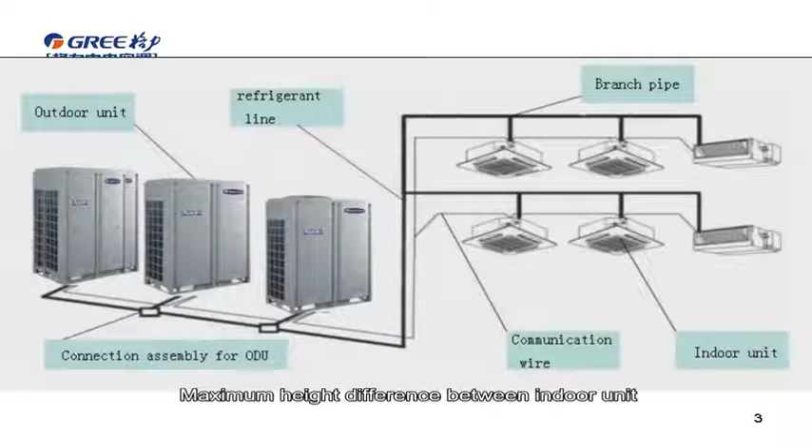Maximum height difference between indoor unit and outdoor unit, which is 90 meters. Maximum height difference between indoor units, which is 30 meters. This design is adaptable to various complicated projects and greatly reduces installation difficulties.

Secondly, high static pressure design. When the unit is installed in the equipment room, relevant static pressure can be set according to the project status. The static pressure of GMV5 outdoor unit is up to 82 Pa. Thirdly, auto-addressing and non-polarized communication. Connection is flexible and installation is convenient.

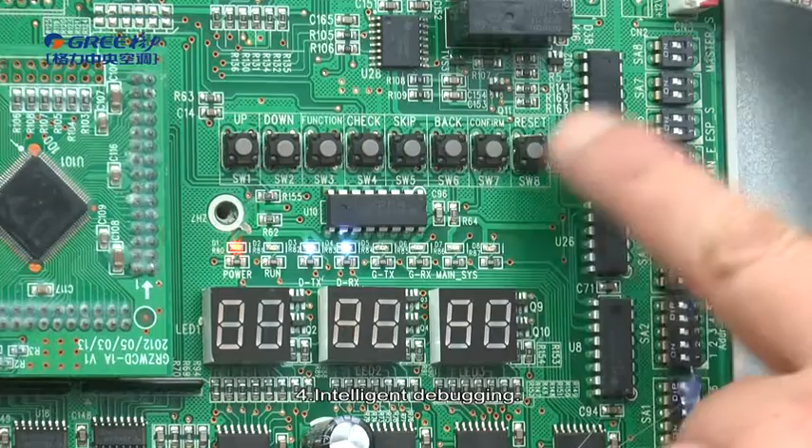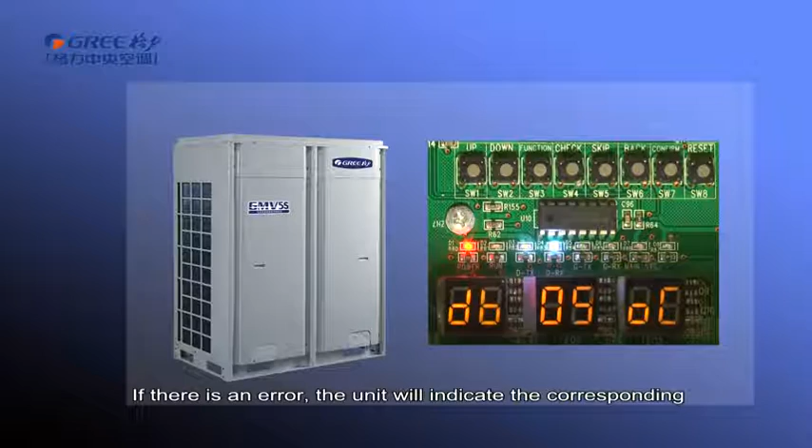The fourth, intelligent debugging. Debugging can be arranged through the button of outdoor unit and debugging software. During debugging, the system will check the quantity of indoor unit and outdoor unit and detect errors automatically. If there is an error, the unit will indicate the corresponding error so that the problems could be quickly solved.

The second part, installation project design. Firstly, model selection project design. A. Confirmation of operation environment. GMV5 can apply to office buildings, supermarkets, schools, hospitals, etc. Please select relevant type of unit according to the location. For some special sites with much dust and strong electromagnetic interference, sufficient evaluation and related measures shall be taken, such as adding filters and isolating power supply.

B. Confirmation of operation requirements. Please take sufficient communication with end users at the beginning of designing. Clearly understand users' operation demands, for example, indoor ambient temperature requirement, concrete object of using the unit, central control. C. Confirmation of project installation requirements. Communicate with the project consultant to see if the reserved installation space is sufficient and if the endurance of building is sufficient.

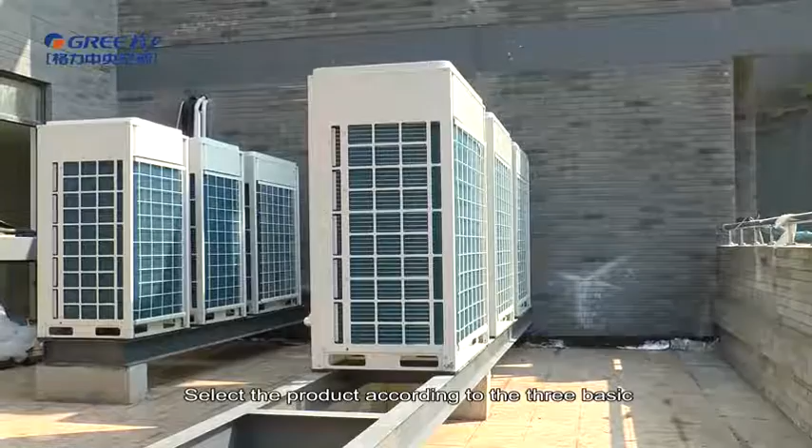D. Selection of relevant type of unit. Select the product according to the 3 basic requirements mentioned above. If the existing product cannot meet the requirement, please discuss with your Gree sales manager to work out a solution.

The second part, installation project design. Installation project design includes: first, installation of outdoor unit. Second, installation of indoor unit. Third, installation of refrigerant pipeline. Fourth, installation of condensate pipe. Fifth, installation of power cable and communication cable.

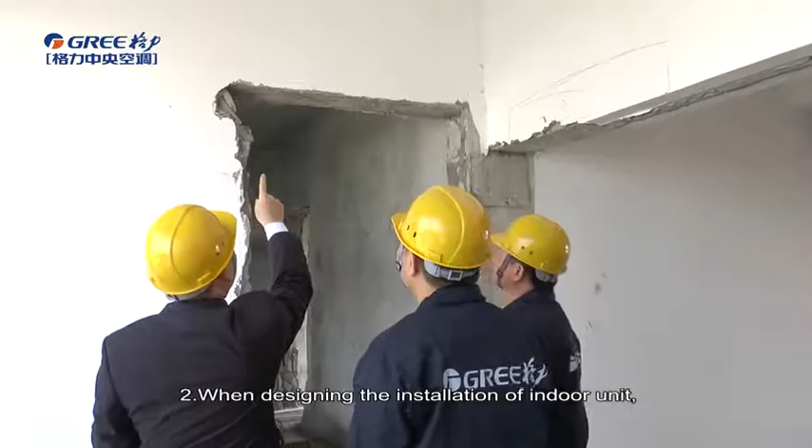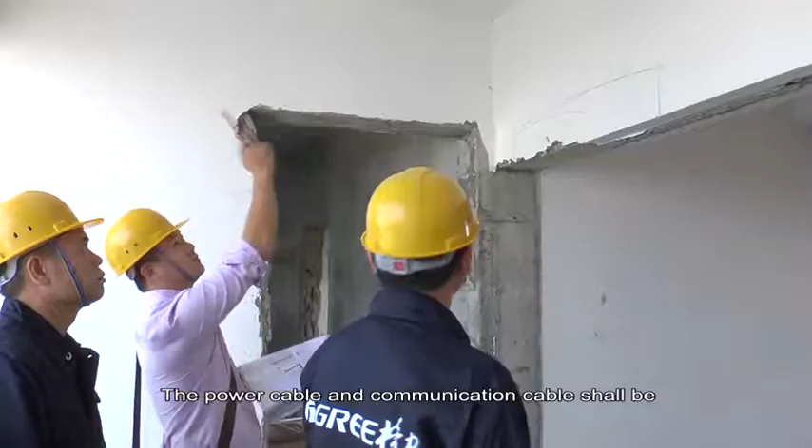Fourth, make sure the drainage height of condensate pipe is sufficient. If not, it is recommended to choose the indoor unit equipped with water pump. Fifth, make sure the reserve power supply capacity and wire material comply with the requirement of the unit design. The power cable and communication cable shall be independent, and the parallel distance between them shall comply with the requirement of unit.

The third part, unit installation. First, preparation before installation. Second, checking and installation of unit. Installation security training. Personal safety is a top priority during the whole installation process. In this process, we must comply with related national and local safety regulations to ensure personal or property safety. Specialized workers must have professional certificates. For example, electricians, welders.

On-site review of design drawing. Installation team must carefully read and understand the design of scheme and drawings provided by engineering designers, and prepare detailed and feasible installation organization design after reviewing the on-site status. Note: installation team must strictly abide by the design drawings. If any design cannot be implemented during installation and needs to be modified, contact the designer first for approval and prepare a written document.

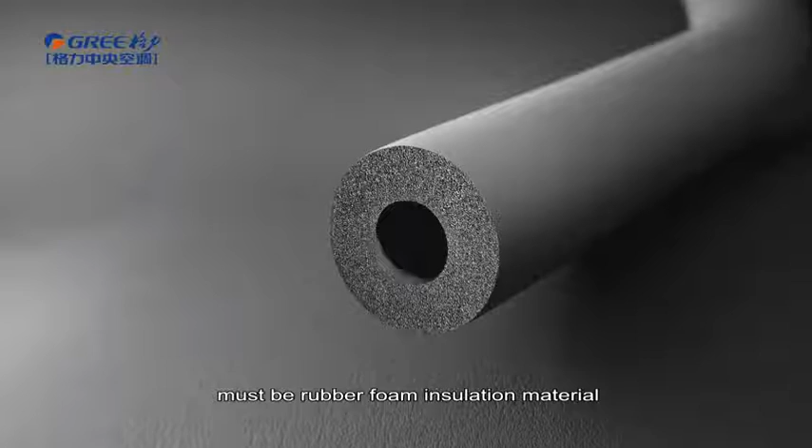Preparation before installation. Prepare the equipment before installation, including copper pipe, insulation material, hanger rod, and communication cable. All materials must comply with the design requirements. Specification of copper pipe thickness. The insulation material of copper pipe must be rubber foam insulation material with fire retardancy level of B1 or higher.

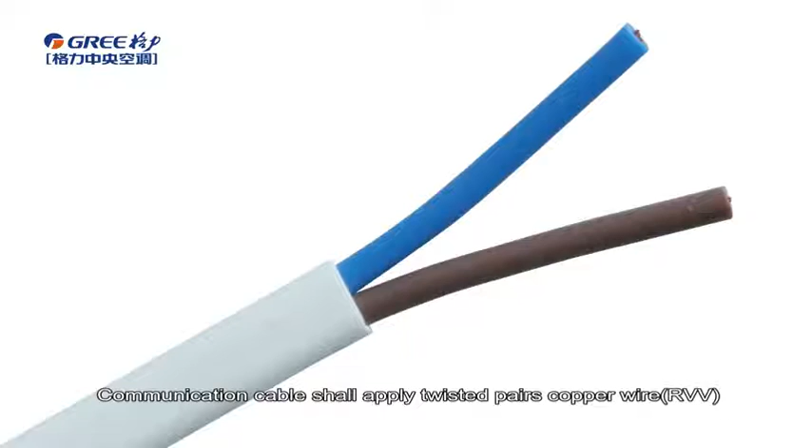When the diameter of copper pipe is equal to or greater than 15.9 millimeters, the thickness of insulation material should be at least 20 millimeters. When it is less than 15.9 millimeters, the thickness of insulation material should be at least 15 millimeters. Condensate pipe shall apply UPVC pipe, PPR pipe, PPC pipe, or HDG steel pipe. Communication cable shall apply twisted pairs copper wire with sectional area of copper core no less than 0.75 square millimeters.

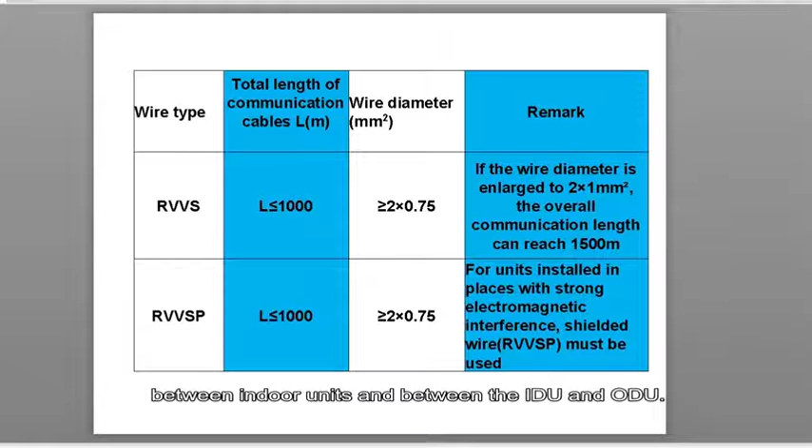For units installed in places with strong electromagnetic interference, shielded wire must be used as the communication cables of the indoor unit and wire controller. The same goes for communication cables between indoor units and between the indoor unit and outdoor unit.

When all materials are prepared, please appoint a person responsible for keeping the materials appropriately to prevent them from dust, water, and fire. Preparation for installation tools. Prepare the following tools before installation: screwdriver, pliers, shifting spanner, pipe cutter, torque spanner, pipe pliers, pressure gauge, level bar, electric drill, electronic balance, vacuum pump.

Checking and installation of unit. When the equipment are brought to the installation site, please open the carton boxes and check the indoor units, outdoor units, and accessories. To avoid rework due to equipment defect after finishing installation, install the units only after checking everything is okay. Checking indoor units.

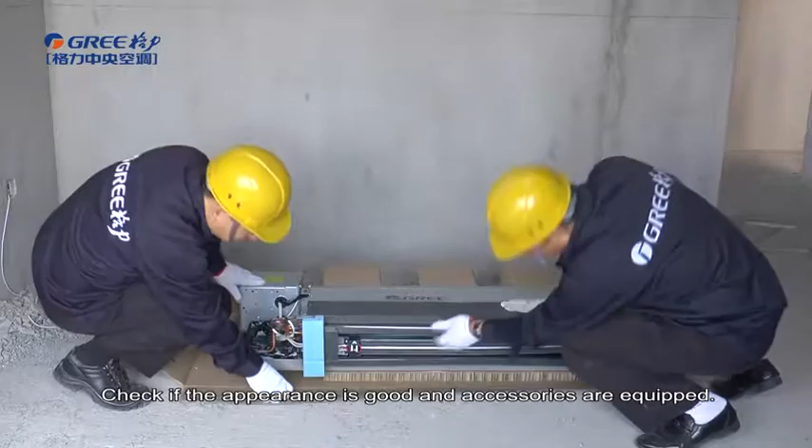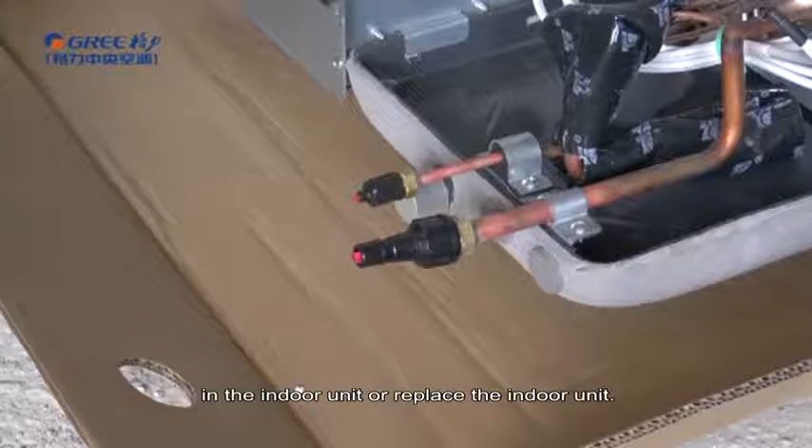Check if the appearance is good and accessories are equipped. Check if there is any leakage and if the pipeline is charged with refrigerant. Sticking the thimble of pipe joint: if there is gas discharge, it means that the unit is okay. Otherwise, please check if there is any leakage in the indoor unit or replace the indoor unit.

Checking outdoor unit. Check if the appearance is good and accessories are equipped. Check if there is any oil mark on the pipeline and traces. If there is oil mark, it means there is leakage in the outdoor unit. Please check the outdoor unit or replace it. Checking accessories. Check if the accessories are equipped with the unit according to the accessory list.

Installation of indoor unit. Steps to install the indoor unit. First, select the correct installation site. Second, drilling holes and fixing hanger rod. Third, fixing and installing indoor unit. Fourth, checking and adjusting level of indoor unit. Fifth, dust prevention.

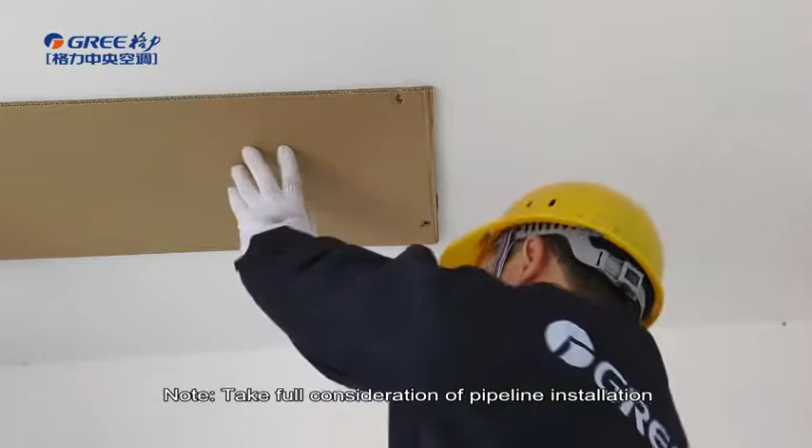First, select the correct installation site. Confirm the hole drilling location of suspending indoor unit with the reference cardboard provided in the indoor unit carton box. Note, take full consideration of pipeline installation and maintenance space during locating. Make sure there is no obstacle within 200 mm from the air return opening of duct-type indoor unit.

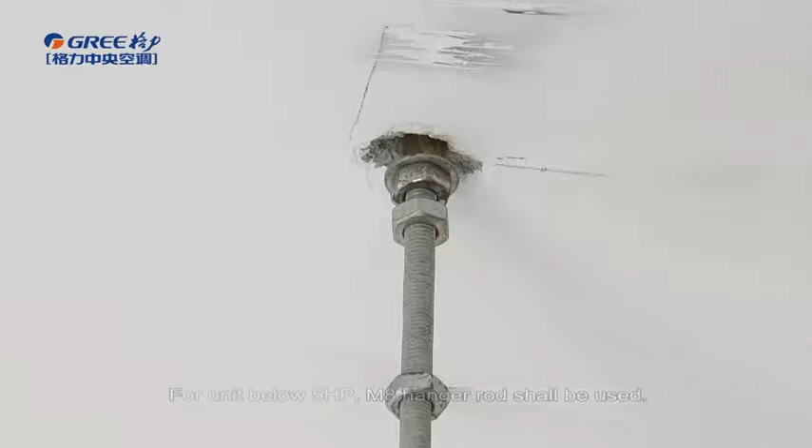Second, drilling holes and fixing hanger rod. Select hanger rod model according to the weight of the unit. For unit below 5 horsepower, M8 hanger rod shall be used. For unit above 5 horsepower, M10 hanger rod shall be used.

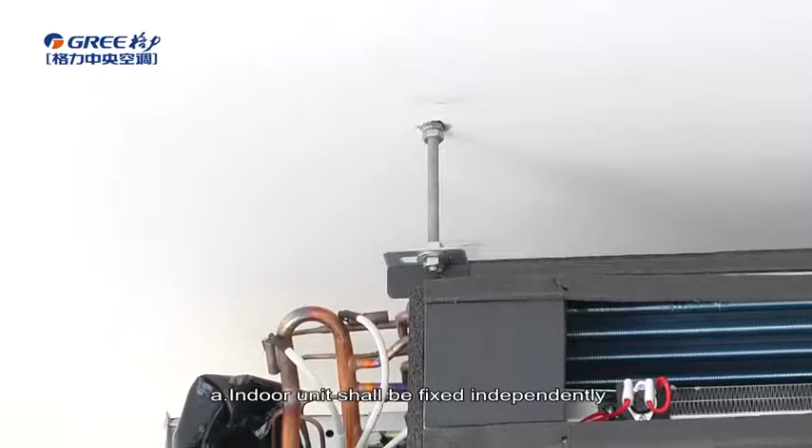Third, fixing and installing indoor unit. In order to avoid accidents, several people shall cooperate for suspending the indoor unit. Please pay attention to the following points during installation. A. Indoor units shall be fixed independently and cannot share the same hanger branch with other equipment or pipeline. B. 4 pieces of hanger rod must be used during suspending. The hanger rods cannot be inclined after finishing installation of unit.

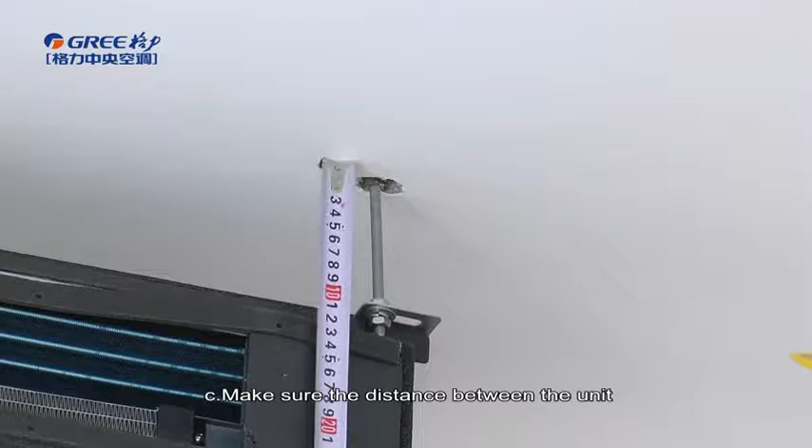C. Make sure the distance between the unit and the ceiling is more than 100 mm during installing indoor unit. D. Fix the indoor unit with 2 nuts in each hanger rod. Put a gasket between the nut and the supporter. Fix the hanger rod and floor with flat gasket and nut. If there is a special damping requirement, please put the damping gasket. If the hanger rod is longer than 1.2 meters, please apply 2 supports at the diagonal to avoid vibration.

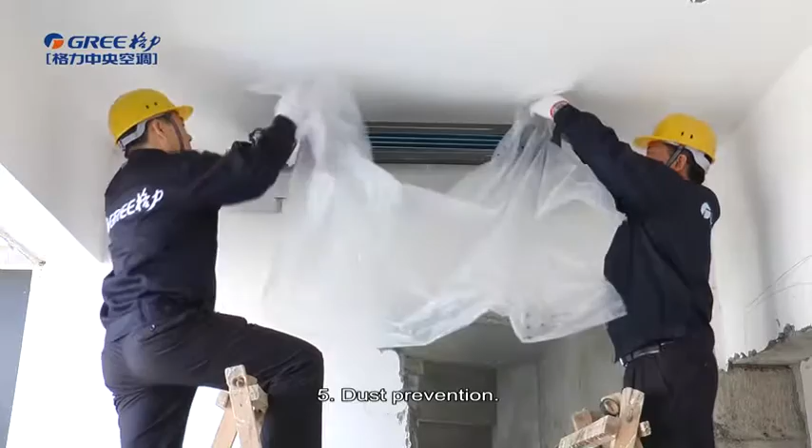Fourth, checking and adjusting level of indoor unit. After finishing installation, check the level of unit with level bar and make sure the unit is horizontal. The unit shall incline towards the drainage direction with height difference between 2 lifting lugs of 6 to 8 mm. Fifth, dust prevention. Wrap the unit with its plastic bag to prevent dust and impurities getting into the unit.

Installation of outdoor unit. Steps to install outdoor unit. First, prepare the foundation. Second, installation of damping rubber pad. Third, carry the outdoor unit. Fourth, fixing outdoor unit.

First, prepare the foundation. The foundation for installing outdoor unit must be strong enough. Ensure that the drainage is smooth and that the ground drainage or floor drainage is not affected. We must use concrete foundation. Requirements on the concrete foundation are as follows. The concrete foundation must be flat and have enough strength to undertake the unit's running weight.

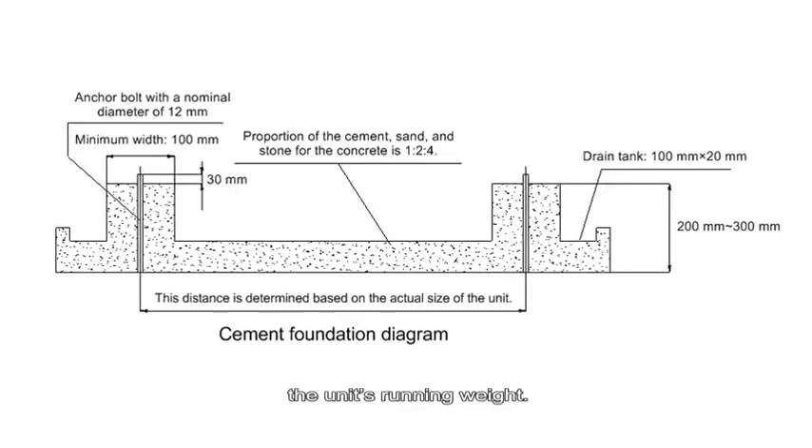The height of the foundation is 200 mm to 300 mm, which is determined based on the size of the unit. The proportion of the cement, sand, and stone for the concrete is 1 to 2 to 4. Place 10 reinforced steel bars with a space of 30 mm among each other. Clear the oil stains, crushed stones, dirt and water in the reserve borehole of the foundation, and install a temporary cover before installing bolts.

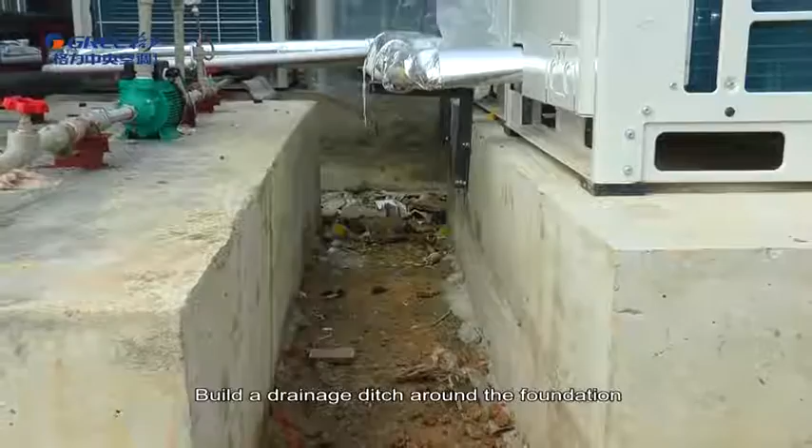Build a drainage ditch around the foundation to discharge the condensed water. If the unit is installed on the roof, please check the intensity of the building and take waterproof measures. If a U-steel foundation is adopted, the structure must be designed with sufficient rigidity and strength.

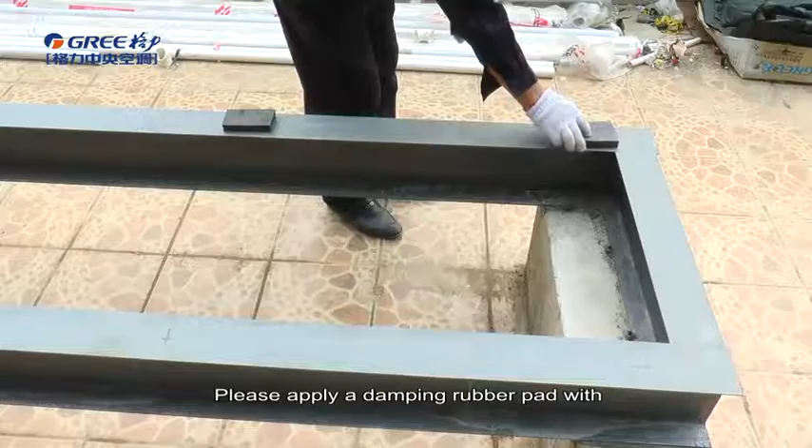Second, installation of damping rubber pad. Please apply a damping rubber pad with thickness of 20 mm or more and width of 100 mm or more between the outdoor unit and the foundation.

Third, carrying outdoor unit. Choose a suitable crane according to the weight of outdoor unit. The rope shall go through the carrying holes at the base. The unit cannot be inclined during carrying.

Fourth, fixing outdoor unit. Fix the outdoor unit to the foundation with 4 M12 bolts securely to reduce vibration and noise.

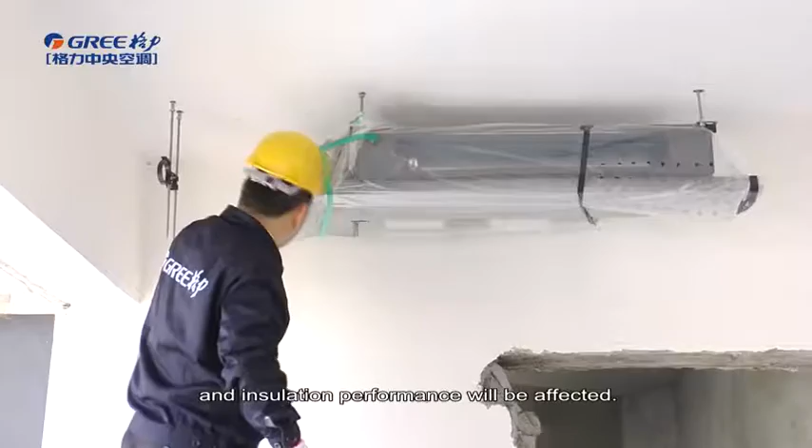Installation of refrigerant pipes. Steps to install the refrigerant pipes are as follows. First, preparing and installing the support, hanger, and brackets. During preparing and installing, choose the corresponding specification according to size of pipeline. If they are too small, the pipeline will be squeezed and insulation performance will be affected. If they are too big, it will be a waste of money and the pipeline cannot be fixed properly, which may cause vibration.

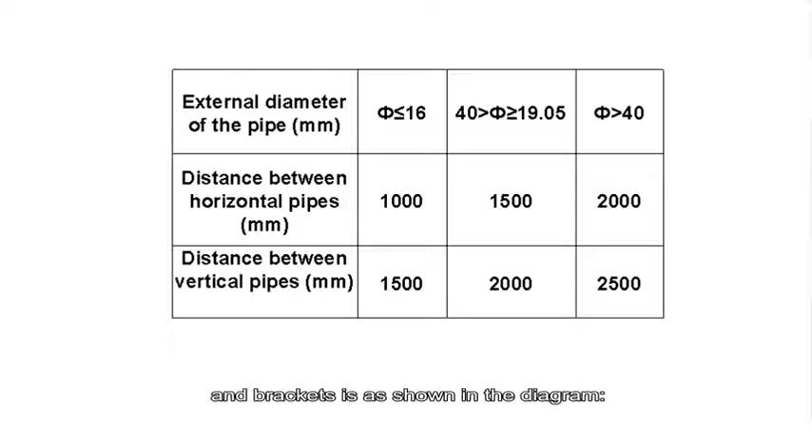The style and workmanship of supports, hangers, and brackets must follow the local standards. The distance between supports, hangers, and brackets is as shown in the diagram. The pipe led through a wall or beam must be fixed by a support, hanger, or bracket on both ends at a position 300 mm away from the hole.

Second, cleaning and processing the pipe. When installing the refrigerant pipes, please ensure the directions and branches are correct within minimum length. Use minimum number of braze welding junctions and elbows.

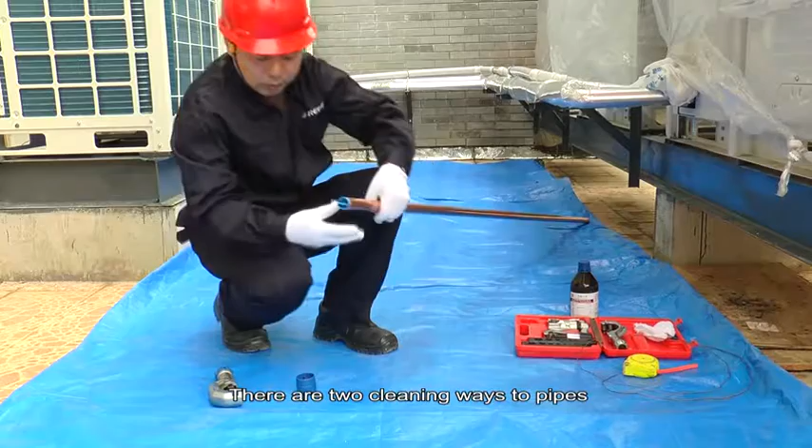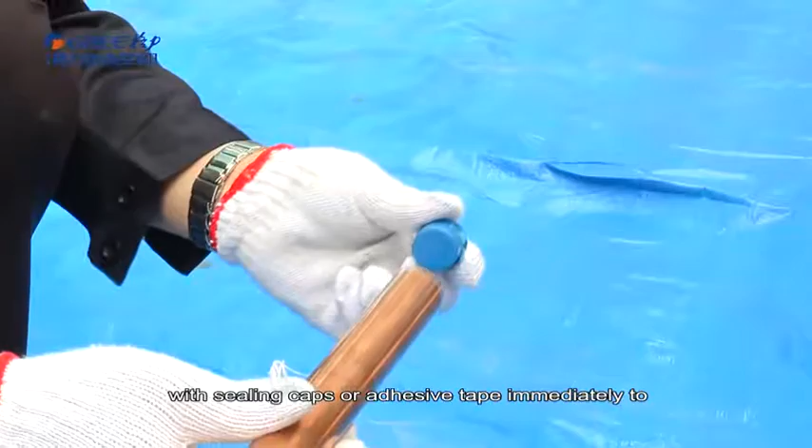After cleaning, cover both ends of the pipe with sealing caps or adhesive tape immediately to avoid sundries getting into the pipe. Third, pipeline insulation. When adding the insulation sleeve, please select the sleeve specification according to the copper pipe diameter. Users cannot cut the insulation sleeve apart.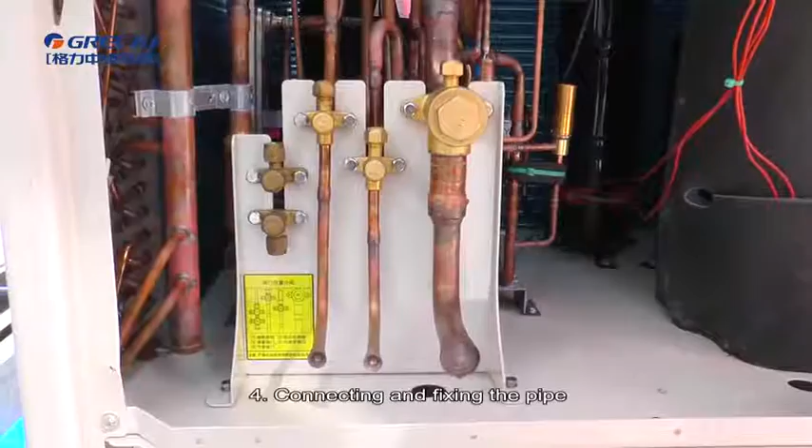Fourth, connecting and fixing the pipe. During welding the pipeline, please follow the regulations strictly. Prohibit welding pipes without charging nitrogen. Prohibit welding pipes with gas. Prohibit fixing the pipe too tightly or too loosely. Please adjust the flexuous pipe straightly. Before connecting the flare opening of the pipe to the indoor unit, please clean the pipe first and then arrange welding or connection.

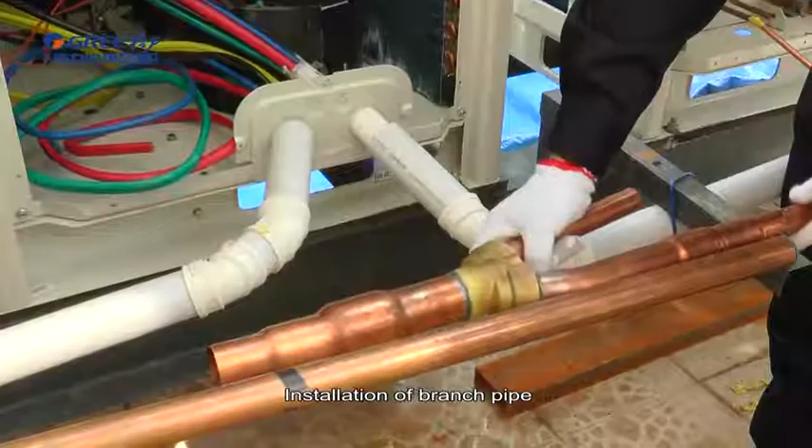Installation of branch pipe. Requirements of branch pipe installation are as follows. A. Ensure that the branch pipe model is correct. B. During installing branch pipe, make sure the length of straight pipe at the front and at the back of the 3 connection pipes is no less than 500 mm.

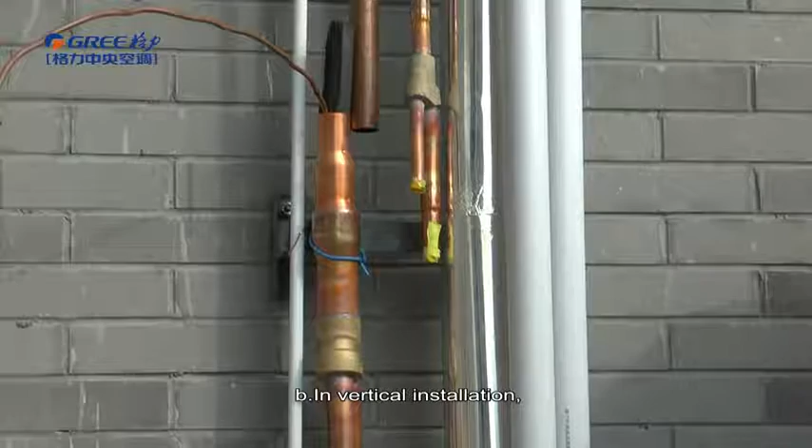C. There are 2 methods of branch pipe installation. A. In horizontal installation, the 3 ports must be on the same level. The shaping size and assembly angle cannot be changed. B. In vertical installation, the direction can be upwards or downwards. 3 ports must be on the same elevation without inclination.

D. Ensure that the branch pipe is close to the indoor unit to reduce impact on refrigerant assignment by indoor unit branches. Fifth, cleaning the contaminants of pipe system.

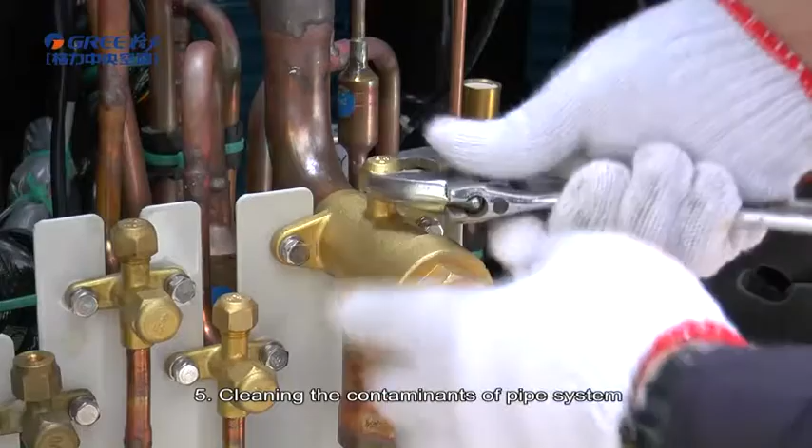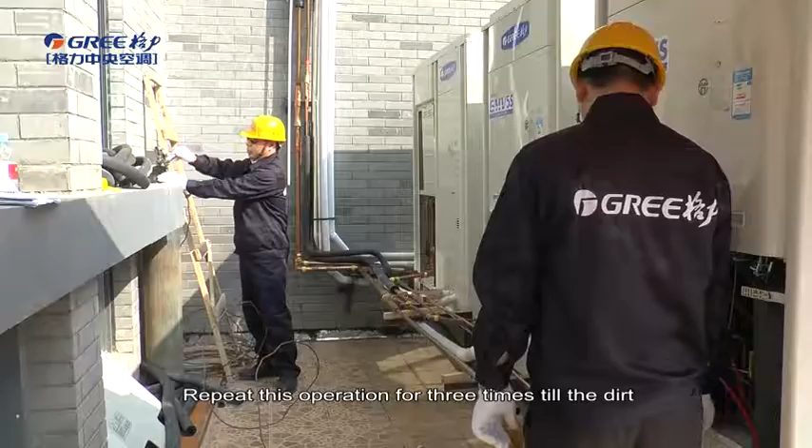Firstly, connect the pressure regulation valve on the nitrogen cylinder to the gas pipe in the outdoor unit. Regulate the nitrogen pressure to about 0.5 megapascal and blow nitrogen into the pipe for 1 minute. Repeat this operation for 3 times till the dirt and water are discharged. After cleaning the gas pipe, perform the same operation to clean the liquid pipe.

Sixth, airtight test. Refrigerant leakage may affect functions of the units or even damage the compressor. If refrigerant leakage is detected after the system is installed, it is very difficult to locate the leaking point as the suspended ceiling has been decorated. Therefore, the airtight test must be performed before ceiling for indoor decoration is finished. Please follow the operation instructions in the service manual. Note, during the airtight test, prohibit connecting the pipeline of outdoor unit.

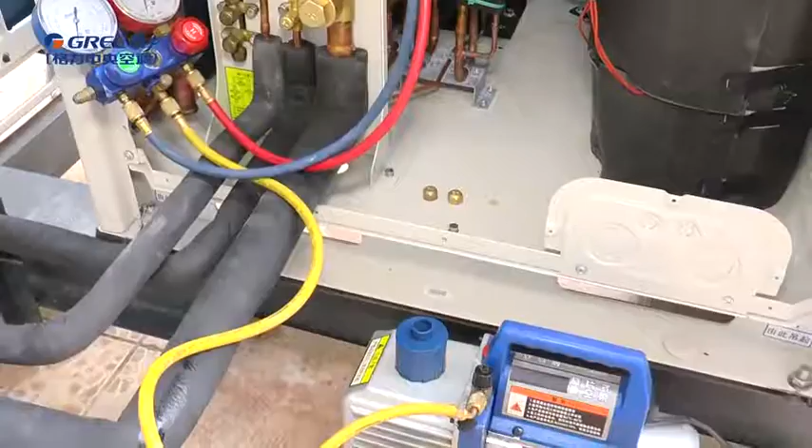Seventh, vacuum the system pipeline. After finishing the airtight test, please connect the outdoor unit pipeline to arrange vacuum. The air discharge capacity of the vacuum pump must be greater than 4 liters per second. The precision of the vacuum pump must be greater than 0.02 millimeters of mercury.

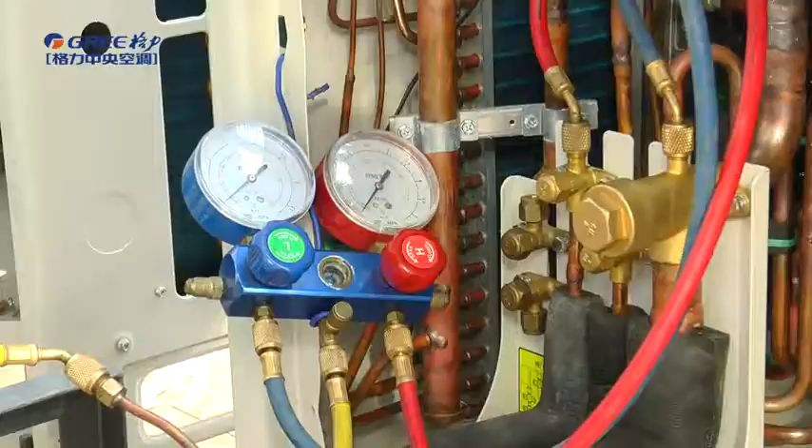After connecting the vacuum pump, let the vacuum pump operate continuously for 4 hours and then check whether the vacuum degree reaches minus 0.1 megapascal. If not, leakage may exist and please perform leakage check again. If no leakage exists, continue to vacuum for 2 hours.

If the vacuum degree cannot meet the standard after vacuuming twice, there may be water in the pipe when it is confirmed that no leakage exists. In this case, discharge water by blowing nitrogen. Perfuse nitrogen at 0.05 megapascal to the pipe, and then vacuum for 2 hours and keep the vacuum for 1 hour. If the vacuum degree of minus 0.1 megapascal cannot be reached, repeat this operation till water is discharged.

After vacuuming, turn off the regulation valve and keep for 2 hours. If the pressure of the regulation valve does not increase, vacuum is passed.

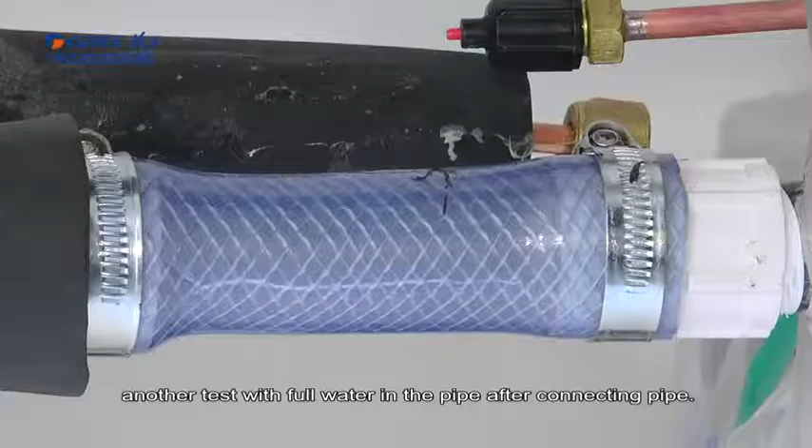Installation of condensate pipe. First, connection between main drainage pipe and drainage pipe of indoor unit. A ventilation hole must be provided on the top of the drainage pipe to discharge condensate water smoothly. Perform a test with some water and another test with full water in the pipe after connecting the pipe. Check whether drainage is smooth and whether water leakage exists in the pipe system.

The insulation layer thickness of condensate pipe should be more than 10 mm. Bond the insulation material joints with specialized glue. Then wrap them with plastic adhesive tape. The width of the adhesive tape is more than 5 cm to prevent dewing.

Notes. First, determine the direction and elevation of a condensate pipe before installing it. Avoid overlapping it with other pipes to ensure straight inclination. The clamp of the pipe hanger is fixed outside the insulation layer. The height of the clamp can be adjusted. Second, distance between hangers as below.

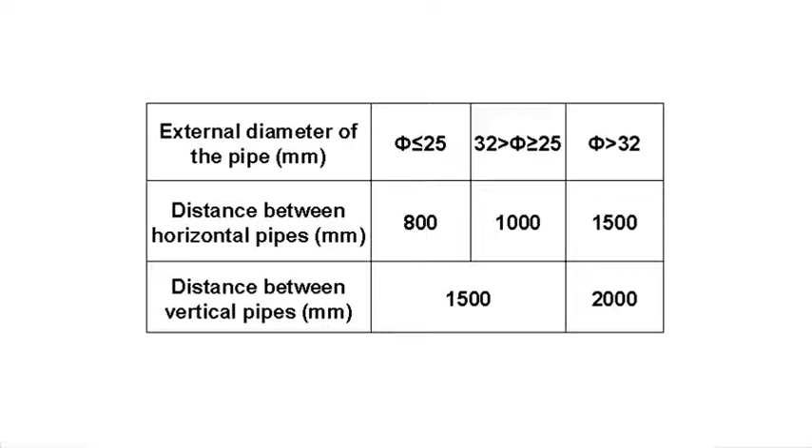Third, the inclination degree of the condensate pipe must be above 1% and that of the main pipe cannot be lower than 0.3%. Adverse slopes are not allowed. Fourth, when connecting three-way pipes, the two-way straight pipes must be laid on the same slope.

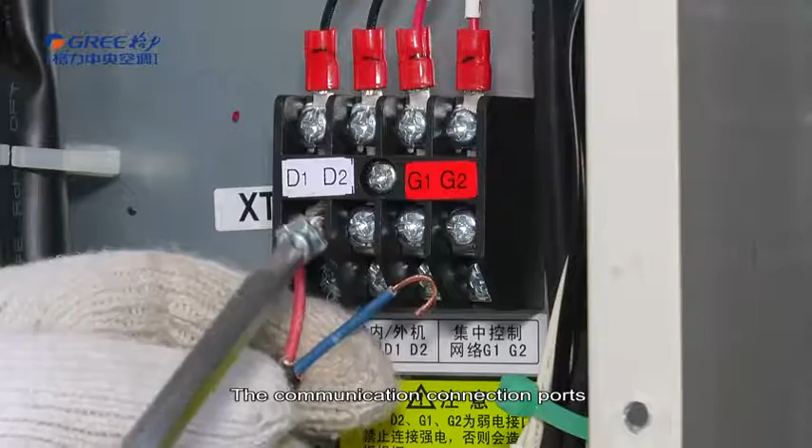Installation of communication cable. The communication connection ports between indoor units are D1 and D2. The communication connection ports between indoor unit and wire controller are H1 and H2. In communication installation, please differentiate the communication cable and power cable clearly. If they are connected wrongly, the main board of the indoor unit may be damaged. Go through pipe and connect wire independently.

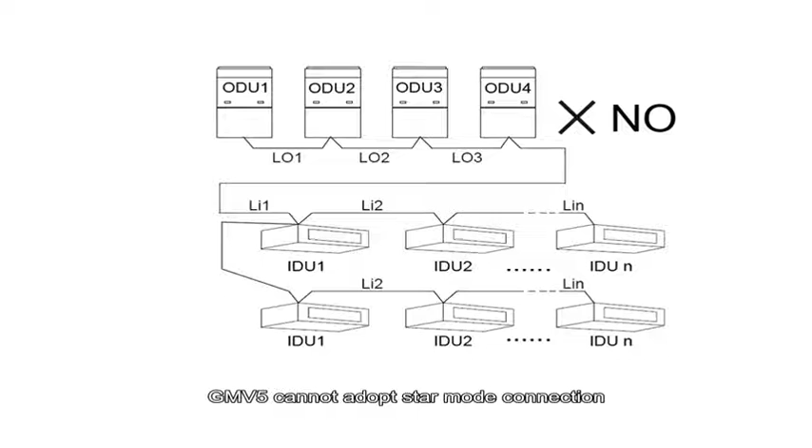GMV5 cannot adopt star mode connection. GMV5 must adopt bus type communication way. The outdoor unit at the beginning of communication shall be set as master outdoor unit. The last indoor unit shall be connected to a communication matching resistor. The resistor is placed in the package of outdoor unit.

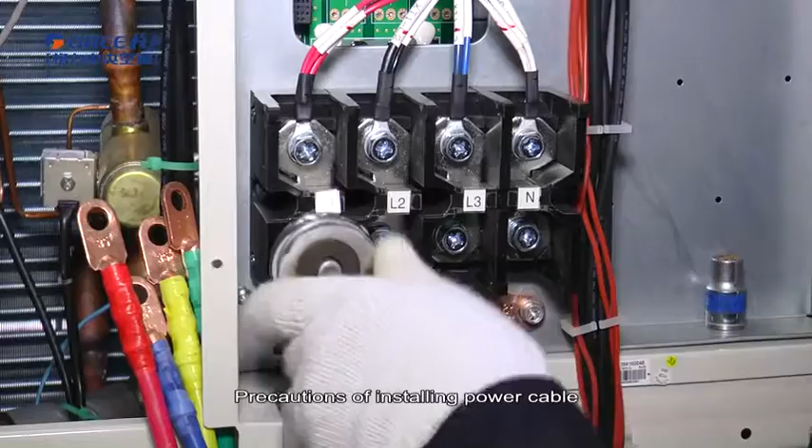Installation of power cable. Precautions of installing power cable. Ground cable must be connected. The yellow-green wire inside the unit is the grounding wire. It cannot be used for other purposes or be cut off. Do not fix it with tapping screws, otherwise an electric shock may be caused. A reliable ground terminal must be provided for the power.

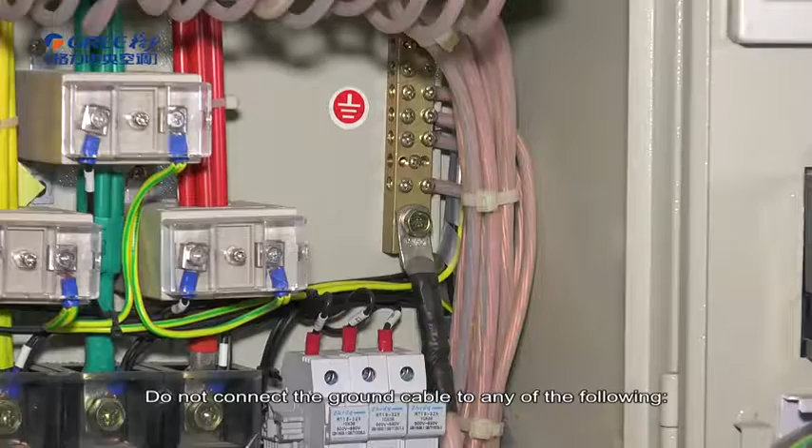Do not connect the ground cable to any of the following: A. Water pipe, B. Gas pipe, C. Drainage pipe, D. Other unreliable places. The power cable and the communication cable must be laid separately with a distance of greater than 20 centimeters. Configure an air switch to each unit for short circuit and overload protection. In addition, configure a general air switch to switch on or switch off the total power of indoor units and outdoor units.

Unit commissioning. First, notes. A. It is forbidden to directly connect the compressor with power supply and forcibly power it on during debugging and maintenance. B. Debugging must be performed on the GMV5 system before system operating. C. If the GMV5 system is not in debugging, the main board of outdoor unit displays module address of 0F-A0 and that of indoor unit displays A0.

D. An outdoor unit must be set as master module and only one master module can be set during debugging. E. An indoor unit must be set as master indoor unit and only one can be set during debugging. F. Please keep the factory settings if there are no special requirements. G. Debugging can be performed even when the wire controller is not connected. It can avoid damage on the wire controller.

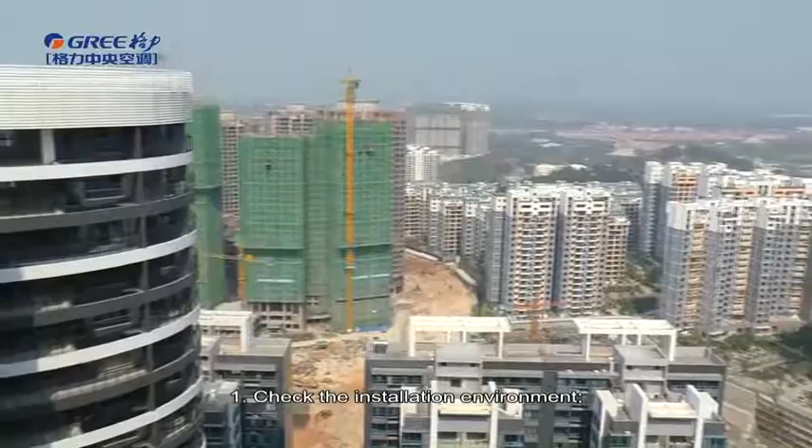First, check the installation environment. Please check the heat exchange environment and electromagnetic radiant components, etc. All checks should comply with local standards. Second, check the appearance of units. Please check: 1. Whether pipeline installation complies with specifications. 2. Whether refrigerant pipes and condensing drainage pipes are thermal insulated. 3. Whether communication cable complies with installation regulation, etc.

Third, check the refrigeration system. Before debugging, make sure that the cut-off valves are fully opened. Check whether there is any oil leakage around the valve.

Fourth, check the electrical system. A. Check for high electromagnetic interference, dusts, and acid or alkaline gas in the operating environment. B. Check the surface of power cable. C. Check the power capacity required for the unit. D. Check the installed air switch model, fuse model, and their using methods.

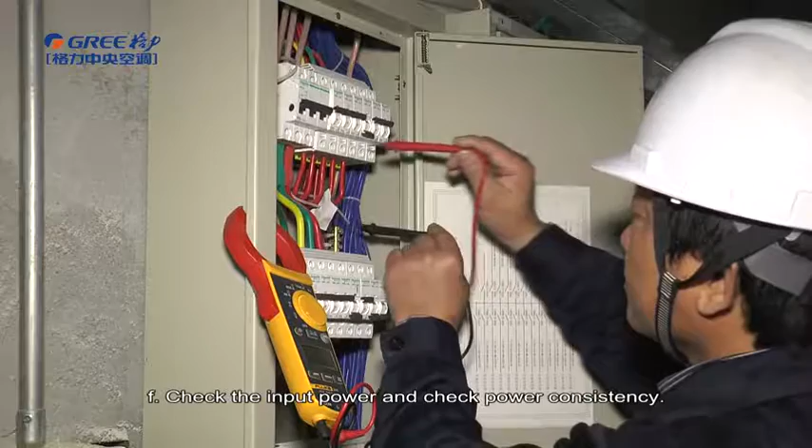E. Check the components in the electrical box. F. Check the input power and check power consistency. Check phase sequence. After powering on the unit, measure whether the value of power supply is normal. Check communication system. Before debugging, make sure the communication cable and power cable are connected correctly.

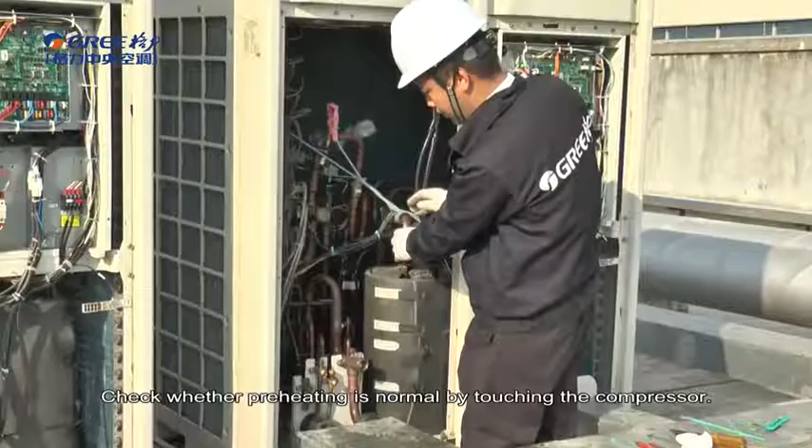Debugging process. Precautions before starting debugging. First, before starting debugging, make sure that the unit compressor has been preheated for more than 8 hours. Check whether preheating is normal by touching the compressor. Debugging can be started only when preheating is normal, otherwise the compressor may be damaged. Second, when debugging is started, the system will select an operation mode according to the ambient temperature automatically.

Third, before starting debugging, make sure again the cut-off valve of outdoor unit has been completely open. Fourth, during debugging, the front panel of outdoor unit must be completely covered, otherwise debugging accuracy may be affected. Fifth, before debugging, make sure that the additional refrigerant charging to the system has finished completely or for more than 70%.

Introduction of debugging methods. GMV5 provides two debugging methods. One is to perform debugging through the mainboard buttons of outdoor units. This method doesn't need specialized tools and can be performed by engineer on site. There are three pairs of LED indicated information. LED 1 shows the debugging code, LED 2 the debugging progress code, and LED 3 the debugging status.

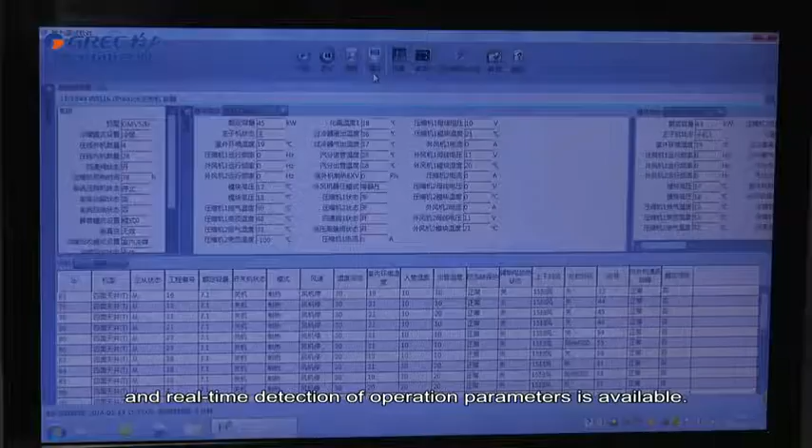The other is to perform debugging through professional software. In this method, connecting computer is required, but the debugging process is intuitive and real-time detection of operation parameters is available. Next, detailed steps of the two debugging methods will be given. Debugging through the mainboard buttons. Step 1. Completely cover the front panel of outdoor unit and open debugging windows of all basic modules.

Step 2. In power off status, set the outdoor unit to a corresponding static pressure mode according to the static pressure design requirement for outdoor unit. For more details about the setting method, please read the Installation, Debugging and Maintenance manual. If there are no static pressure requirements, keep the factory settings. Step 3. In power off status, set one outdoor unit as master unit by keeping its SA8 dip switch in 00 factory setting status. Set other modules as slave module by setting SA8 dip switch to 10.

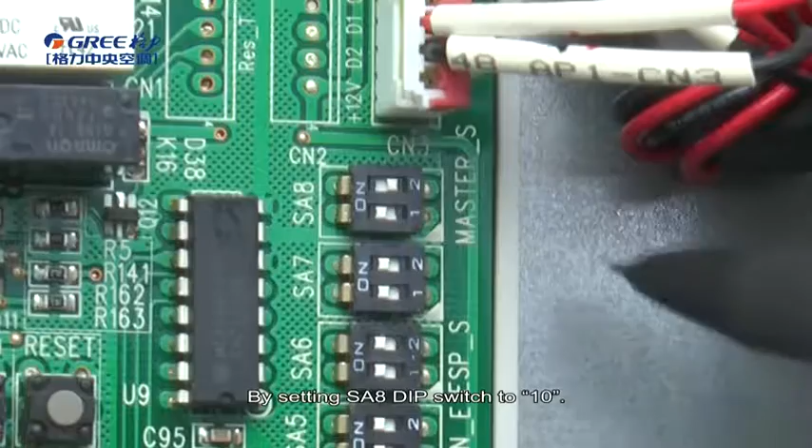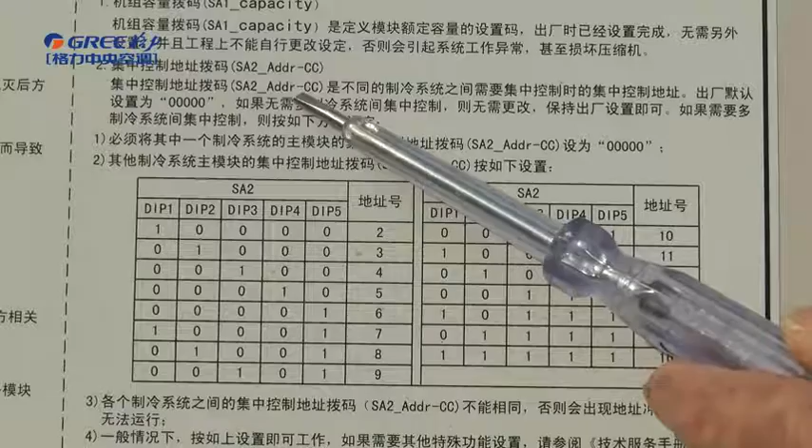Step 4. If centralized control is required, set the centralized control address SA2 in power off status of outdoor unit. Retain the master module address setting of one system in 00000 status. The centralized control addresses SA2 of other systems' master modules cannot repeat. Note, you could retain default settings for slave modules, and it is not needed to set the slave module SA2 dip switches of all systems. If centralized control is not required, you could keep default settings, and it is not needed to set this dip switch.

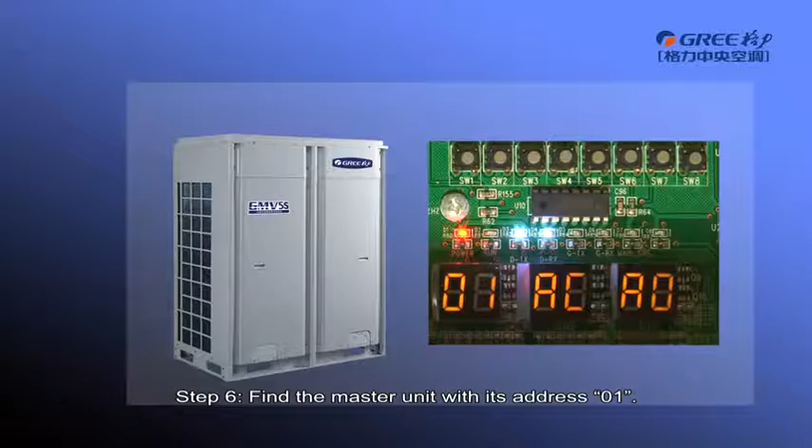Step 5. Power on all outdoor units and indoor units. If LED 3 displays A0 on the mainboard of all outdoor units, it indicates that the unit is on the non-debugging status. Step 6. Find the master unit with its address 01. On the master unit, press Confirm button for 5 seconds to begin debugging.

Step 7. Wait for the unit to operate debugging step 1 and 2 automatically. If the master module is incorrect, error code CC or CF will display on the LED 3. CC means the system does not set the master module. CF means the system has more than 2 master modules. When the master module has been set successfully, LED 3 will display OC and it will enter step 2 automatically.

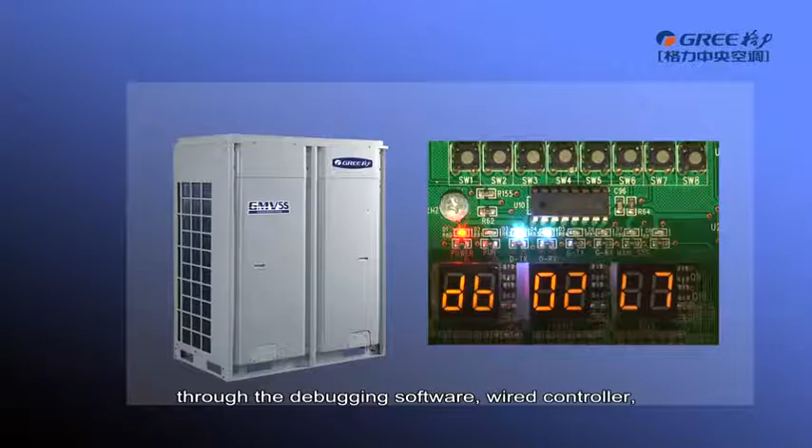If no master indoor unit is detected in step 2, LED 3 will display error code L7. In this case, all outdoor unit buttons are temporarily not functional. Users can set the master indoor unit through debugging software, wired controller or remote controller within 1 minute. If no master indoor unit is set within 1 minute, the system will set a master indoor unit automatically. Then the system enters the next step automatically.

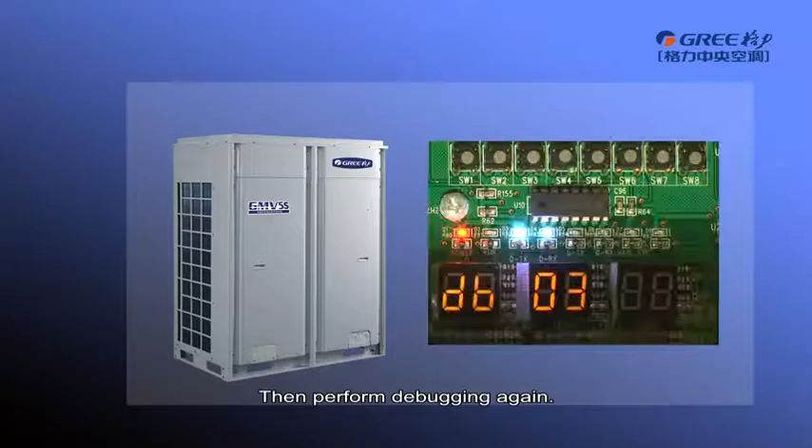Step 8. Step 3 is to confirm quantity of outdoor units. If the display quantity is consistent with the actually connected units, the unit enters step 4 automatically. If the display quantity is inconsistent with the actually connected units, power off the outdoor units and check whether the communication cables are connected correctly. Then perform debugging again. Note, it is very important to confirm the quantity of outdoor units. If the confirmed quantity is inconsistent with the actual quantity, the system may run improperly.

Step 9. Step 4 is to confirm the quantity of indoor units. If the display quantity is consistent with the actually connected indoor units, please press Confirm button to enter Step 5. If the display quantity is inconsistent, please check whether each indoor unit is powered on and then check whether communication cables are connected correctly.

Note, it is very important to confirm the quantity of indoor units. If the confirmed quantity is inconsistent with the actual quantity, the system may run improperly.

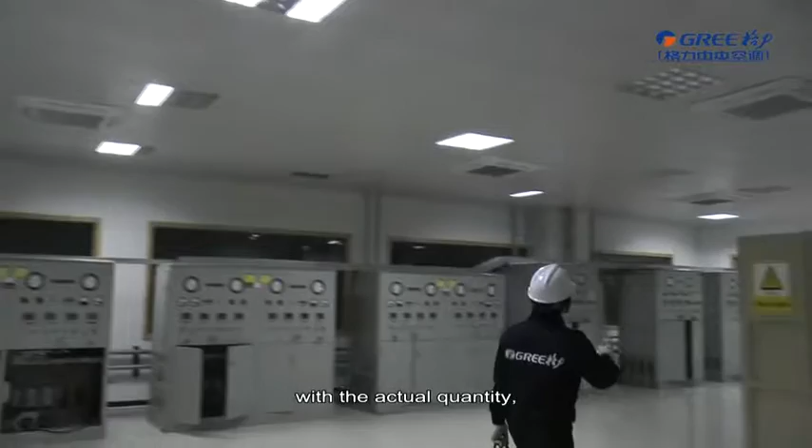Step 10. Step 5 is unit internal communication and capacity matching detection. If the detection is abnormal, the unit will retain the current status. The errors could be C3, communication failure between master unit and fan driver; C2, communication failure between master unit and compressor driver; CH, rated capacity ratio between indoor unit and outdoor unit is too high; CL, rated capacity ratio between indoor unit and outdoor unit is too low.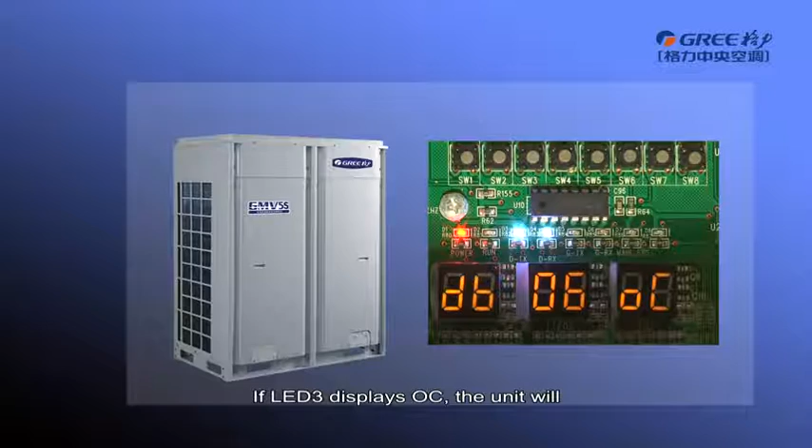If C2 or C3 appear, please check whether the internal wiring and the mainboard are in good condition. If CH or CL appear, please increase or decrease indoor unit quantity to ensure the ratio within 50 to 135%. If LED 3 displays OC, the unit will enter the Step 6 automatically.

Step 11. The Step 6 is outdoor unit electric component detection. If the detection is abnormal, the unit will retain the current status. If the detection is OK, OC will display on LED 3 and the unit enters the next step automatically.

Step 12. The Step 7 is indoor unit electric component detection. If the detection is abnormal, the unit retains the current status. The LED 3 displays the 4-digit project number of the indoor unit. The corresponding error code will be displayed after 3 seconds.

For example, if ambient temperature sensor error occurs in indoor unit number 16, LED 3 will display 00 first and then display 16, and display error code DL. In this case, please confirm whether connection is correct and replace the sensor until error disappears. If the detection is OK, LED 3 should display OC and the unit enters the Step 8 automatically.

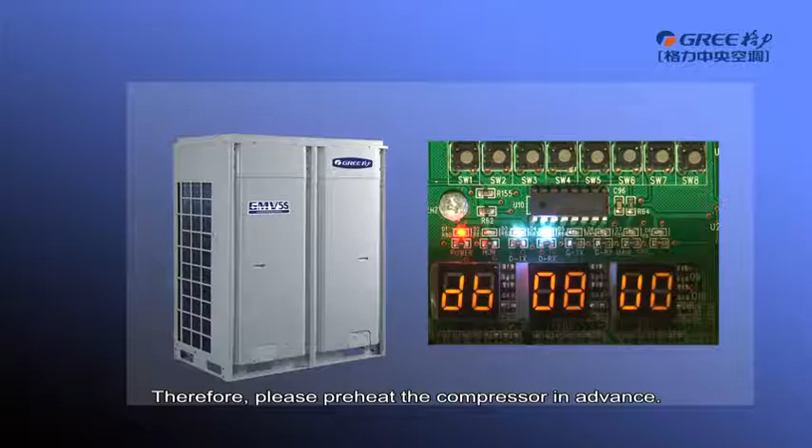Step 13. The Step 8 is compressor preheating confirmation. If it is detected that the compressor preheating period is less than 8 hours, error code U0 will be displayed. Therefore, please preheat the compressor in advance. If it is detected that the compressor preheating period is more than 8 hours, the unit will enter Step 9 automatically. Note, if preheating period reaches 8 hours while the unit shall be powered off, the power off period shall not exceed 2 hours. Otherwise, preheating shall be arranged again.

Step 14. The Step 9 is about the pre-startup refrigerant confirmation. If no refrigerant in the system or the refrigerant amount does not meet the system startup requirement, error code U4 will be displayed. The unit cannot enter the next debugging step. In this case, check for leakage or charge refrigerant till the U4 disappears. If the refrigerant amount meets the system startup requirements, the unit will enter the Step 10 automatically.

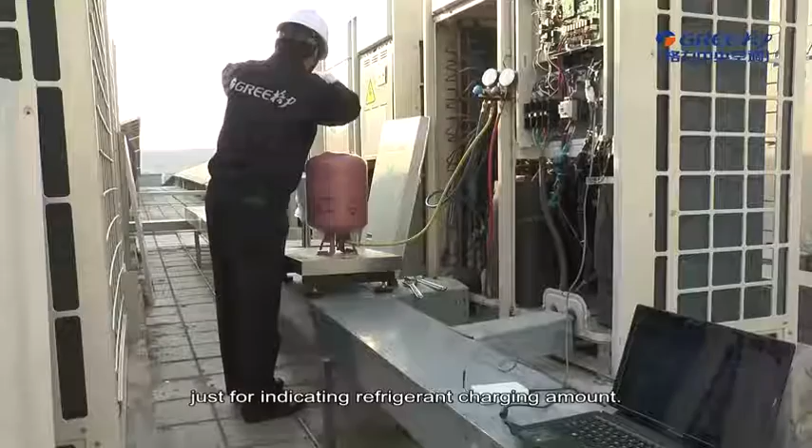Step 15. The Step 10 is pre-startup outdoor unit valve status detection. If LED 3 of master module displays on, it indicates that the unit is being enabled. If LED 3 displays U6, it is required to check again whether the outdoor unit valves are open completely. After confirming that all valves are open completely, press Confirm button to enter the Step 11. Step 16. In the step 11, the system verifies refrigerant charging amount. This step needs no operation, just for indicating refrigerant charging amount.

Step 17. The step 12 is unit debugging startup confirmation. Confirm again all preparations are completed. Then enable the unit to debugging process. If LED 3 of master module displays AP, it indicates that the unit is waiting for enable confirmation. If it is confirmed to enable the unit, press Confirm button. LED 3 displays AE, and the unit enters the step 13 automatically.

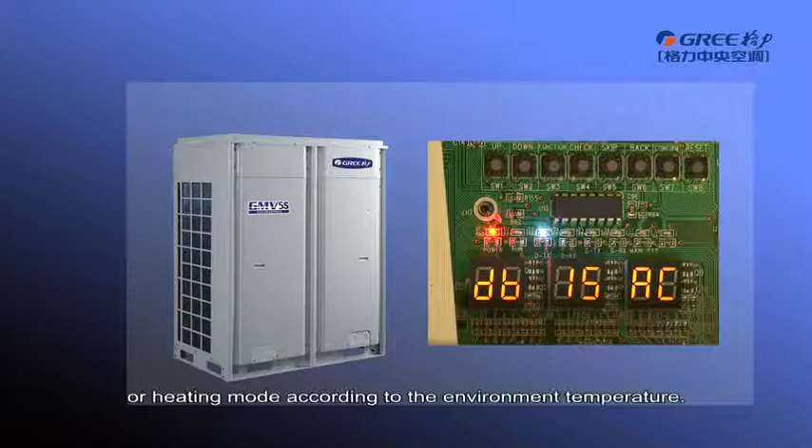Step 18. After unit startup confirmation, the system automatically selects the cooling or heating mode according to the environment temperature. If LED 3 of master unit displays AC, it indicates that the unit is in cooling mode. If LED 3 of master module displays AH, it indicates that the unit is in heating mode. In unit operation, it will detect the action status of each electric component and pipeline status, etc. If everything is normal after the unit continuously operates for 40 or 60 minutes, the system confirms the debugging completion automatically, and then all units will stop and restore the standby status.

Debugging through the debugging software. Firstly, we will show you the required hardware and connection way. You need laptop, Gree USB data converter kit, communication cable, cross screwdriver. Gree USB data converter kit includes software installation CD, data converter, and USB data line. Note: please use the specialized data converter during debugging.

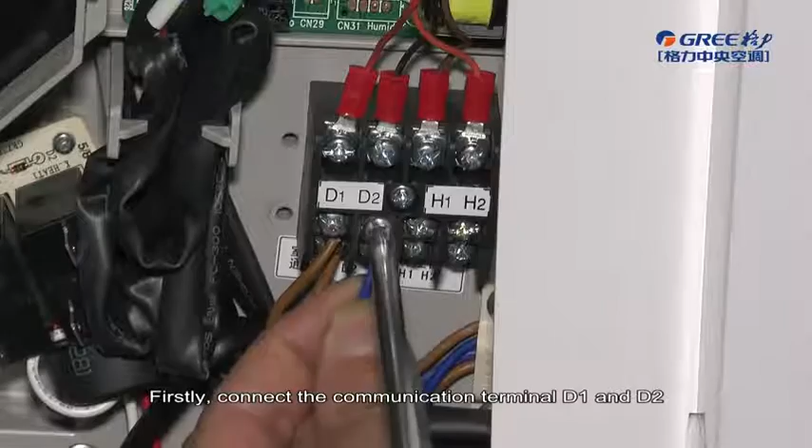Connection way. Firstly, connect the communication terminal D1 and D2 of indoor unit with one end of data line. Connect the CAN communication interface of data converter with the other end of data line. Then connect the data converter with one end of USB data line and connect the laptop with the other end. Finally, press Set button until the CAN communication light is on.

Software installation. Put the software installation CD into the laptop. After finishing installation, run the debugging software. For more details, please read the Installation, Debugging, and Maintenance Manual or Gree USB Data Converter Instruction Manual.

Debugging process. Step 1 to Step 5 are the same as the method of debugging through the outdoor unit. The debugging from Step 6 is as follows. Firstly, click Connect to switch the debugging software to the debugging control interface. Click Debug to switch to the engineering debugging interface. Click Start to enter the debugging function, and the software performs debugging automatically.

Related icon is displayed to indicate that debugging passed or is still being performed. For the phase with OK displayed, a manual confirmation is required for entering the next debugging step. Click this icon to display online unit quantity, which provides reference for selection. Click Close to close the information.

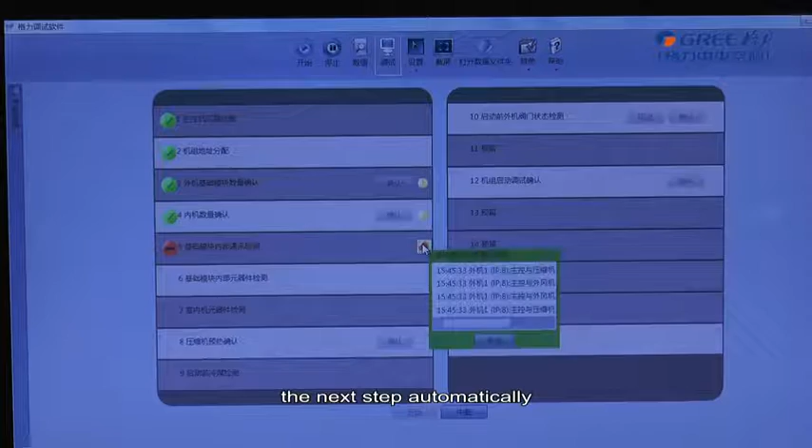Related icon is displayed to indicate that debugging is not passed on the phase and troubleshooting is required. After troubleshooting, the unit enters the next step automatically if no OK exists. Otherwise, click OK to enter the next step. Click the related icon to display relevant information detected on this phase, which provides reference for troubleshooting. During debugging, click Stop to stop debugging, and then click Start to continue debugging till debugging ends.

Back and Skip are provided in Step 10, outdoor unit valves checked before startup. When Step 10 is abnormal, click Back to return to Step 9. Click OK in Step 9 to perform debugging again for Step 10. If a U6 fault occurs in Step 10, users can click Skip to skip the fault. For other faults, Skip is unavailable.

Debugging steps 11, 13, and 14 are reserved. Step 12 is the debugging confirmation step. Steps 13, 14, 15, 16 are parallel steps. After completing debugging, the interface is shown as below. Green icon is displayed on the project debugging completion step to indicate that project debugging is completed and the whole debugging steps are finished.

Sort and save data. Make detailed records of abnormalities and troubleshooting methods during debugging for later maintenance and inquiry. At last, make a debugging report and hand it over to users.

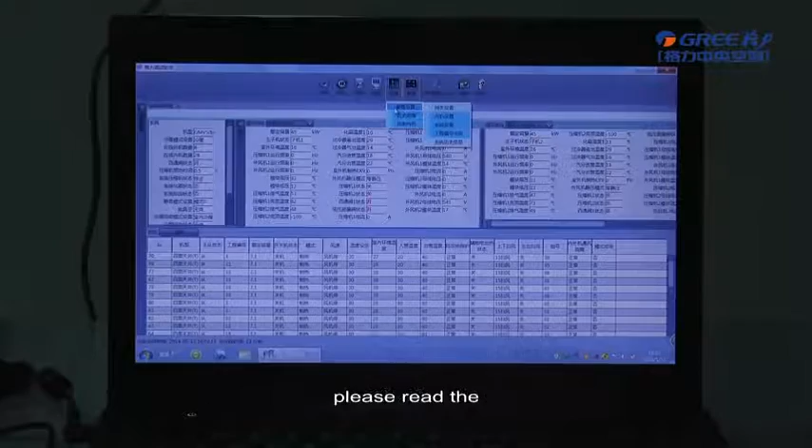Engineering function setting. When debugging is completed, set the related functions of the unit according to actual engineering function demand. For more details about the setting method, please read the Installation, Debugging and Maintenance Manual. If there is no special demand, just retain factory setting. It is better to tell the customer which is the master indoor unit and stick the label.

Fifth, operation of wire controller and door control system. Door control functions. The wire controller of GMV5 can be connected with a door control device in order to control the unit on or off. The unit will stop when removing the keycard and resume previous operation status when connecting the keycard. Connection between hotel wire controller and door control system.

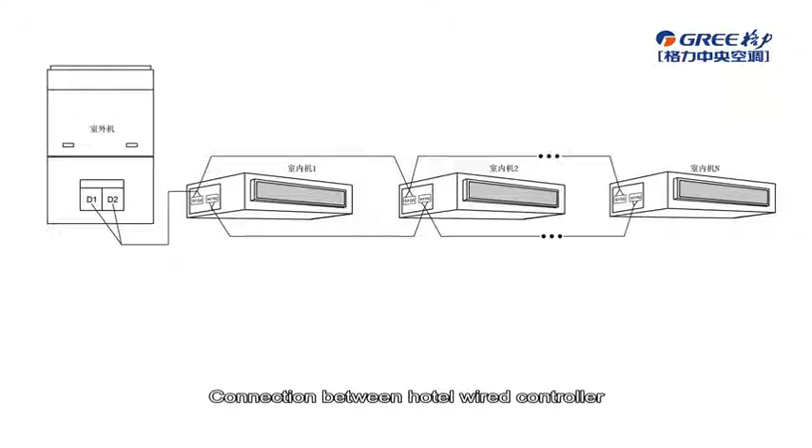First, only connecting the hotel wire controller. The indoor unit can only be connected with the hotel wire controller and then the hotel wire controller is connected with the door control system. In this case, the unit can be turned on or off by inserting or removing the keycard.

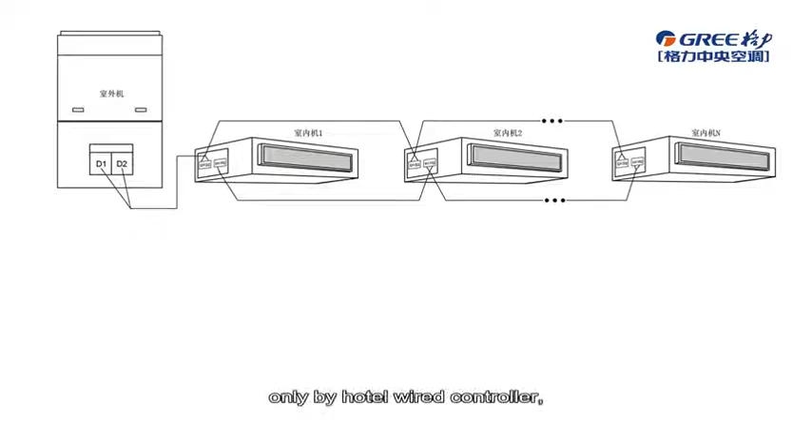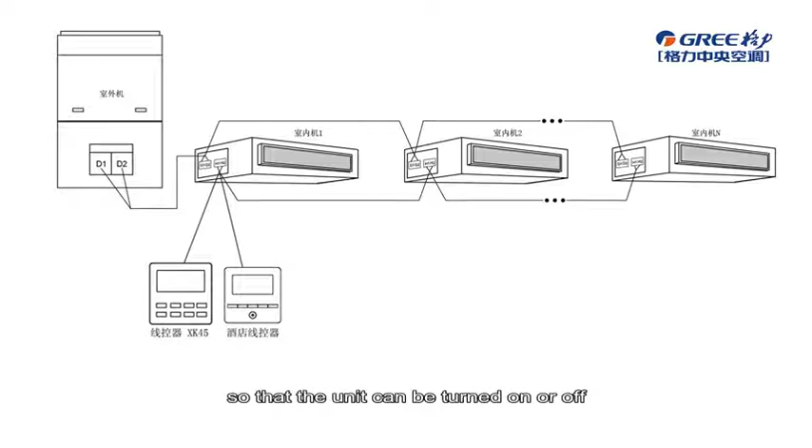Second, connecting the hotel wire controller with another wire controller. If the user needs the door control system but doesn't want to control the indoor unit only by the hotel wire controller, another wire controller can be used together with the hotel wire controller. For example, wire controller XK45 can be adopted. Set one wire controller as the master wire controller and set the other as the slave one. Then connect the hotel wire controller to the door control system so that the unit can be turned on or off by inserting or removing the keycard.

Instructions of door control signal interface of hotel wire controller. The connection between hotel wire controller and indoor unit is the same as the normal wire controller. Hotel wire controller connects to the ports H1 and H2. Note, first, ports N and L are door control power interfaces with 100 to 240 volts, 50 Hz or 60 Hz. Second, ports VCC and GND are door control power interfaces with DC 5 to 24 volts.

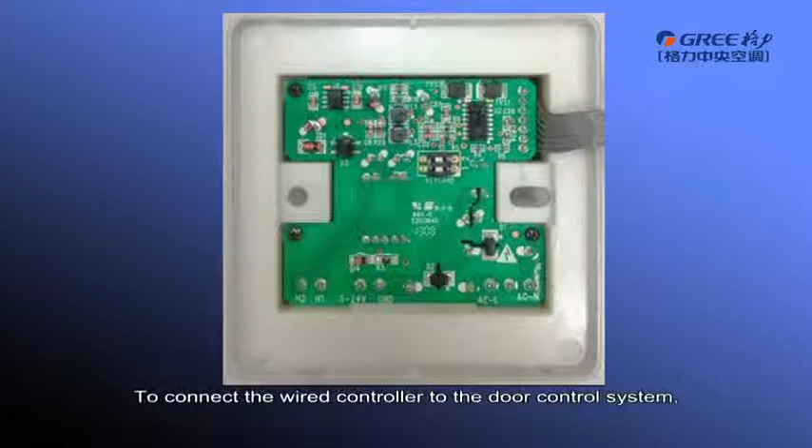Users can select only one from 100 to 240 volts and DC 5 to 24 volts. To connect the wire controller to the door control system, set switch 1 of DIP S1 on the base plate of the wire controller to on, and then connect the door control signal wire to ports N and L or ports VCC and GND of the terminal block.

6. User training. When the unit operates normally, introduce the daily maintenance methods and the operation instructions of the temperature display control device to the user so as to ensure proper and reliable operation of the unit.